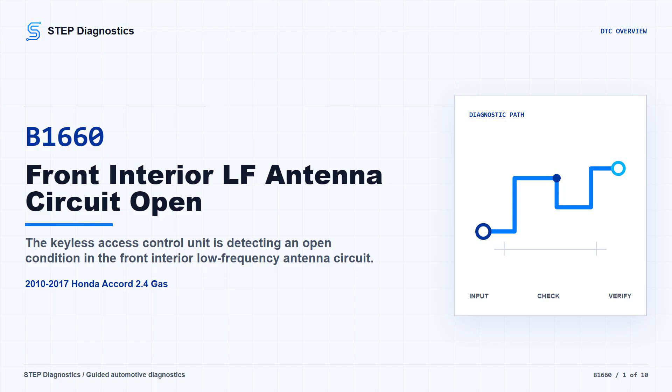B1660 points to an open circuit fault in the front interior LF antenna circuit for the keyless access system. In plain terms, the keyless access control unit may not be seeing the antenna circuit the way it expects to. The customer may notice keyless access or one-push start behavior that feels inconsistent, especially when the system needs to detect the key inside the cabin. Broadly, this can come from the antenna itself, the connector and wiring between the antenna and the keyless access control unit, or the control unit's output side.

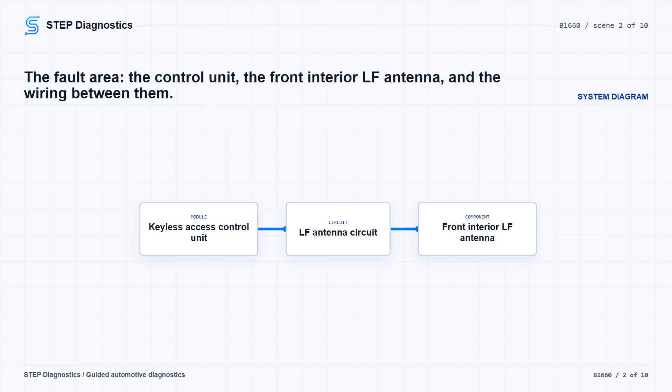We're going to work the fault in that order: confirm the code, check whether the control unit can drive the antenna circuit, then check the wires for an open or high resistance. Start by clearing the DTCs with the HDS. From the HDS mode menu, go into the self-check, run the self-check, then check for DTCs again.

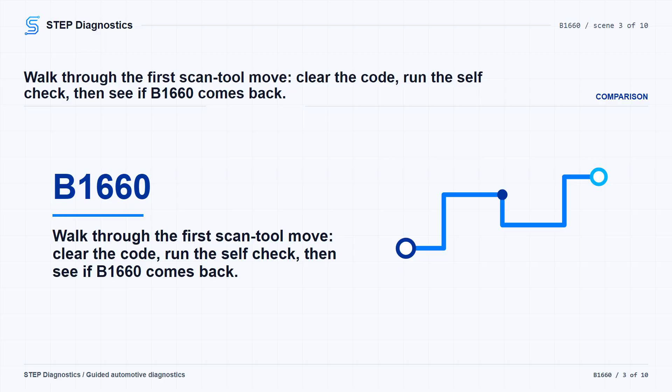If B1660 does not come back, treat it as an intermittent failure. The system is okay at that moment, so concentrate on loose terminals, poor connector fit, or a connection that may open up with vibration or movement.

If B1660 is indicated again, continue into the front interior LF antenna circuit checks.

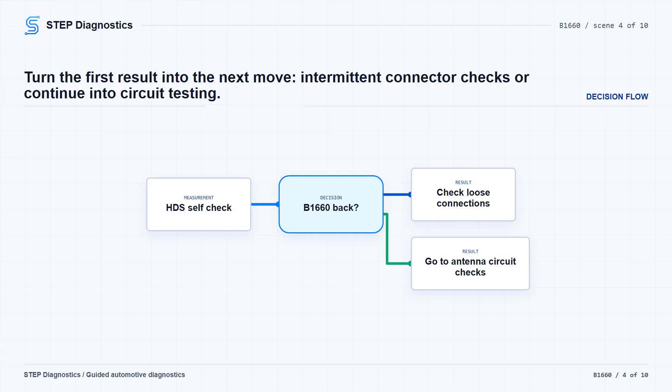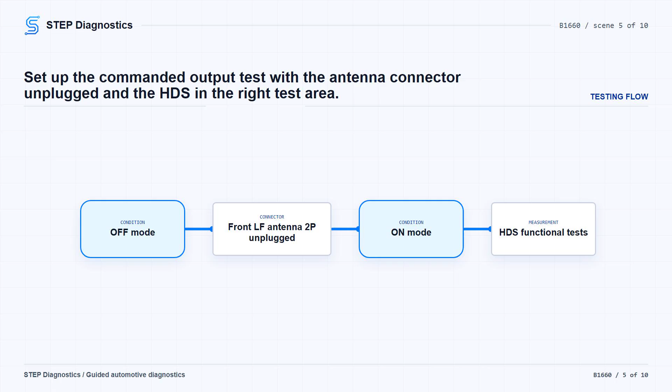For the EXTF plus and EXTF minus line output check, press the engine start/stop button to put the vehicle in OFF mode. Disconnect the front interior LF antenna 2P connector. Then press the engine start/stop button again to select ON mode. On the HDS, select keyless access control from the one-push start system menu and enter functional tests.

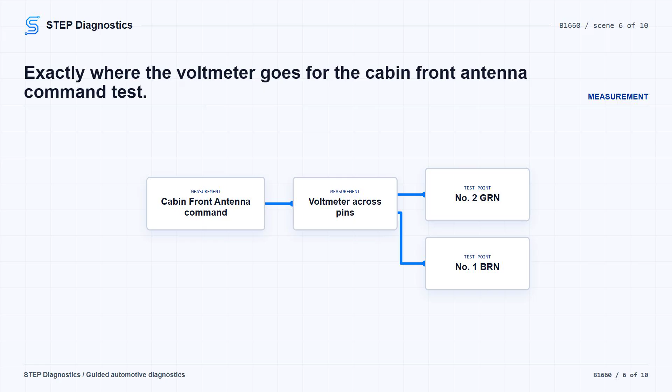Connect the voltmeter across the front interior LF antenna connector. Test point 1 is terminal no. 2, the GRN wire, and test point 2 is terminal no. 1, the BRN wire. Now select cabin front antenna with the HDS and watch for voltage.

If voltage is present during that command, replace the front interior LF antenna. If there is no voltage, move on to checking the circuit between the antenna and the keyless access control unit.

Next, put the vehicle back in OFF mode. Disconnect keyless access control unit connector A, the 32P connector. With the keyless access control unit connector and the front interior LF antenna connector both disconnected, check continuity through each circuit.

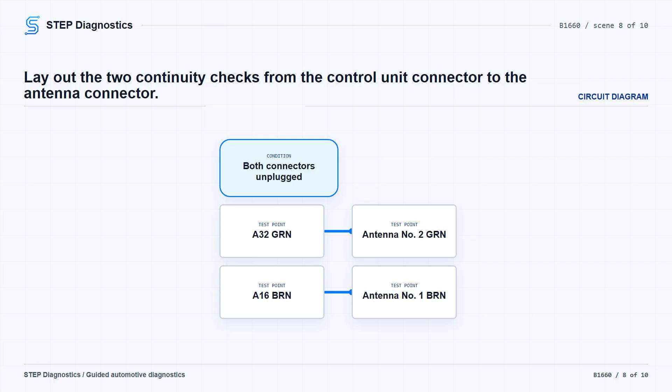For the EXTF+ circuit, check from keyless access control unit connector A no. 32, the GRN wire, to the front interior LF antenna 2P connector no. 2, also GRN. For the EXTF- circuit, check from keyless access control unit connector A no. 16, the BRN wire, to the front interior LF antenna 2P connector no. 1, also BRN. If continuity is good on the check circuits, replace the keyless access control unit.

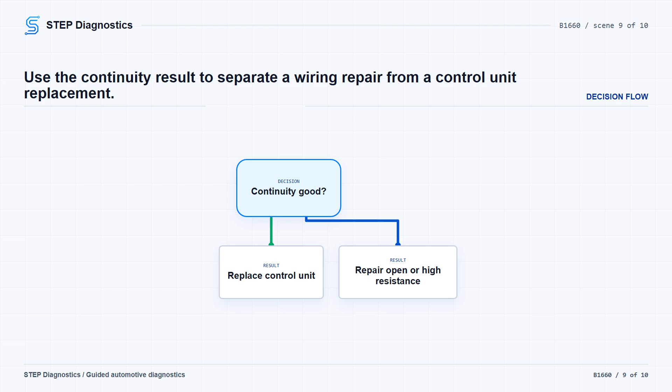If continuity is not present, repair the open or high resistance in the wire. The clean way through B1660 is to prove whether the code is active, command the cabin front antenna output, and then separate an antenna fault from an open wiring fault or a control unit output fault. Do not skip the connector checks if the code is intermittent.